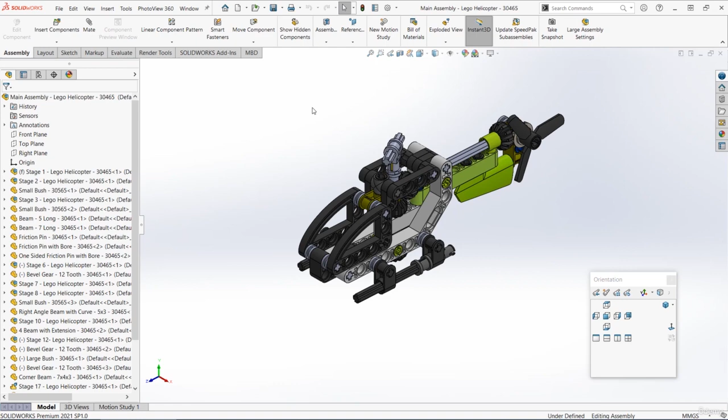We're now onto the final stage, stage 22. For this, we've only got to make one new part, the main rotor blade. And to do this, we're going to modify the large bush part.

Let's find that part somewhere within the assembly and open it. Then let's go File, Save As. Let's choose Save as Copy and Open, and save this as large rotor blade. You can then close your original part.

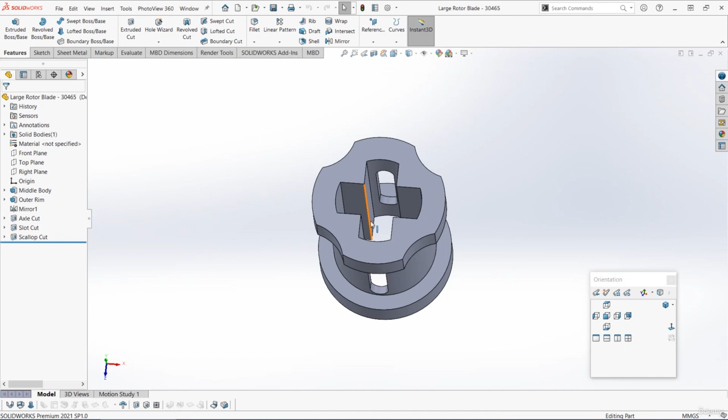If we look at the rotor blade part, on the right it's a large bush, then there's a pin area, and then there's the actual rotor blade. So we can keep this large bush part exactly as it is. We don't have to take anything away, we're just going to add some new features.

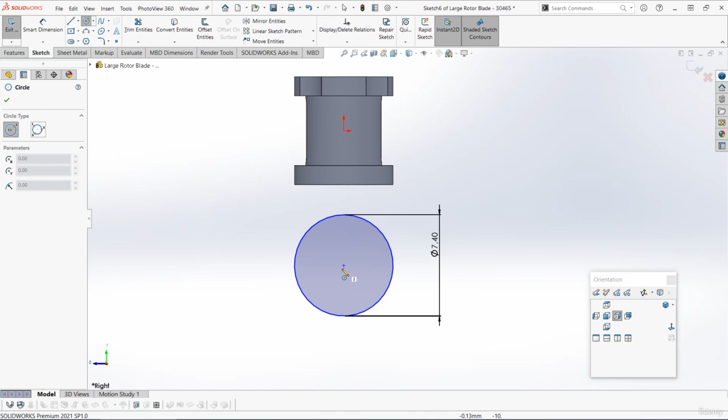First, let's start a sketch on the right plane. We'll go Normal To and get the circle tool and draw a circle somewhere down here, so it should be the opposite end to where those scalloped cuts are. Then the diameter should be 7.4 millimeters, and there's also a smaller circle inside this one that's 4.8 millimeters.

These should both be lined up vertically with the origin. Then for the position from the very end here to the outside of the circle is 15.6, and you can hold down Shift to dimension to the outside of that circle. So you should have 2 fully defined circles which are a little bit away from that existing body.

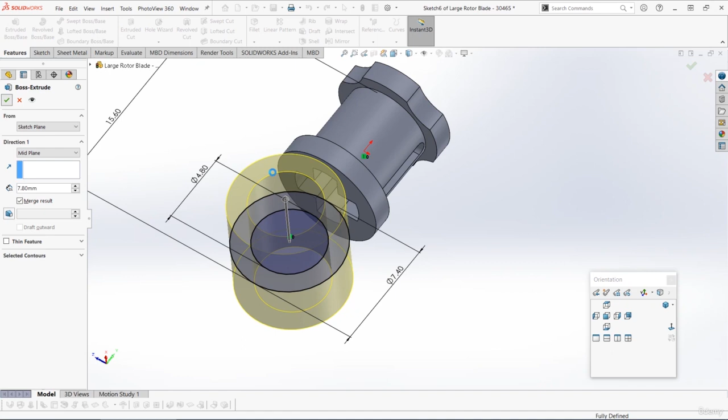We can then go Extruded Boss Base. Let's go mid-plane 7.8 millimeters, and that should insert a new body like this. We can call that something like pinhole.

We now need to join these 2 bodies together. So let's start a sketch on this face, on the first body, and then let's select that outer circle and press Convert Entities. So we should have a 7.4 millimeter circle in this new sketch.

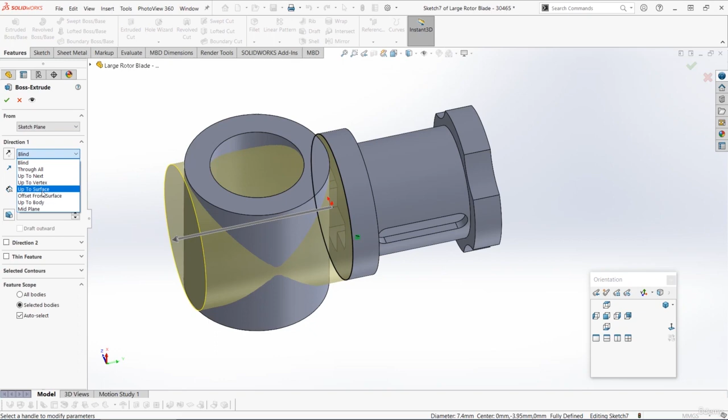We can then just go Extruded Boss Base, and from the drop down, let's choose Up to Surface, and then let's select this surface. So you should join these 2 parts together, something like this. We can call that feature Join.

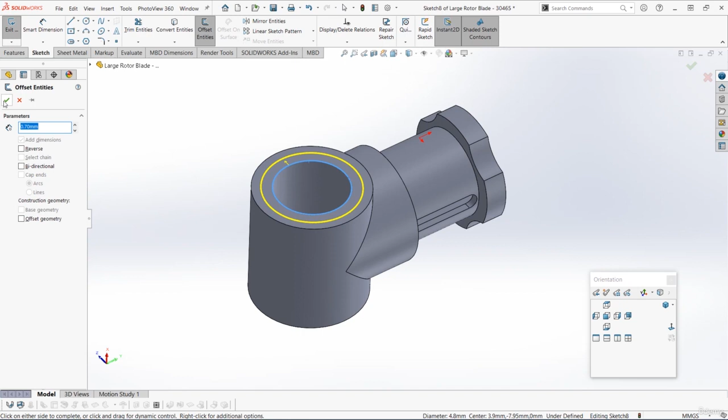Next, before we start actually making the blade, let's cut out the small rim on the top of this pinhole. Start a sketch on this top face, choose that inner circle and then just offset that 0.7. We can then do an extruded cut downwards 0.8, and you can call that feature something like rim cut.

We now have that outer rim on one side and we also want it on the other side. So let's select that rim cut feature, also select the plane that goes down the middle and then press mirror. When the preview looks good, just press OK. So we have that rim cut on both sides.

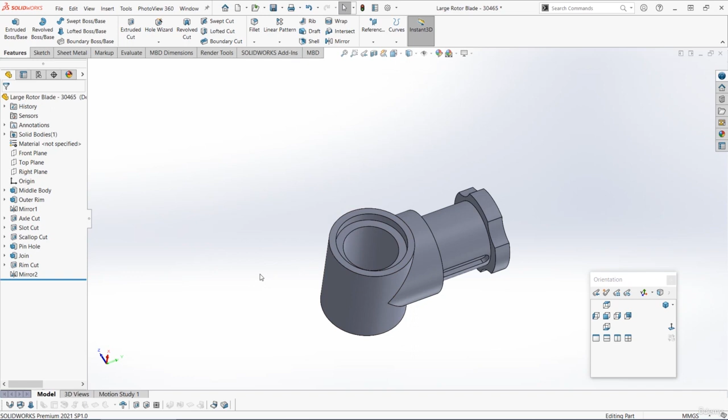Now we can start to actually make the rotor blade shape. First up, we've got a bit of a root section that's a little bit wider than the main blade. To draw this, let's start a sketch on the right plane and go Normal To. First up, I'm going to select that outer circle of the pin area and press Convert Entities, so we now have that circle in this sketch.

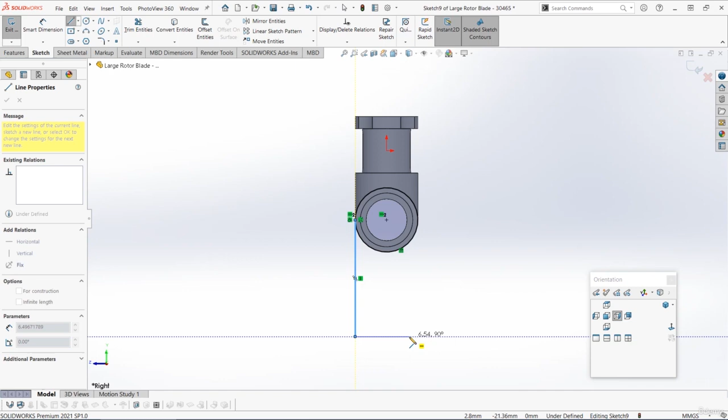Then get the line tool and draw a profile something like this. From this outer point of the circle, I'm going to go directly down and then directly across. Then I'm going to go upwards and slightly right, so we've got a little bit of an angle, and we're going to join that circle. So we don't want to go up vertically, we want a little bit of an angle like this, and let's join on that circle somewhere around here, not at that widest point.

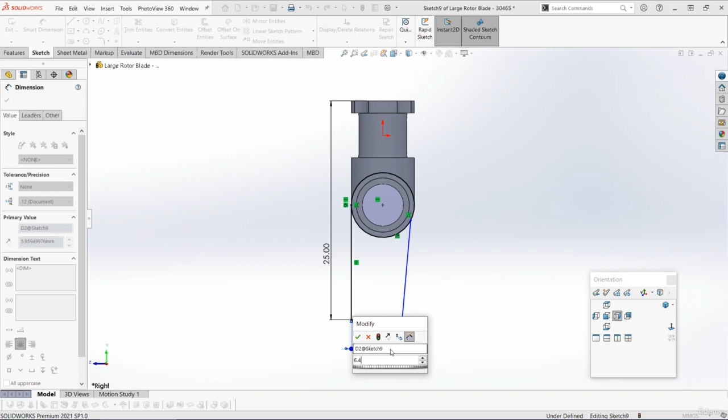We can now set some sizes. Let's set the total height here as 25 millimeters. The width across here should be 6.4. Then over here, let's just select the circle, also select the line, and just make those tangent, and that should fully define your sketch.

Then just before we extrude, let's just round off these bottom corners. I'm going to go to the Sketch tab, choose Sketch Fillet, set a size of 1 millimeter, and then just select those 2 bottom corners.

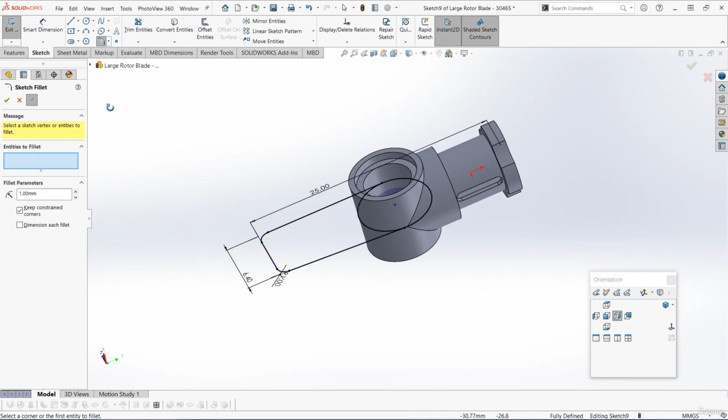We can now extrude this closed area. So let's go to Features, Extruded Boss Base, and I'm going to choose that area there, and then we'll do a mid-plane extrude 3 millimeters. So you should have something like this.

It's like a really small section of the blade, and let's call that feature Blade Root.

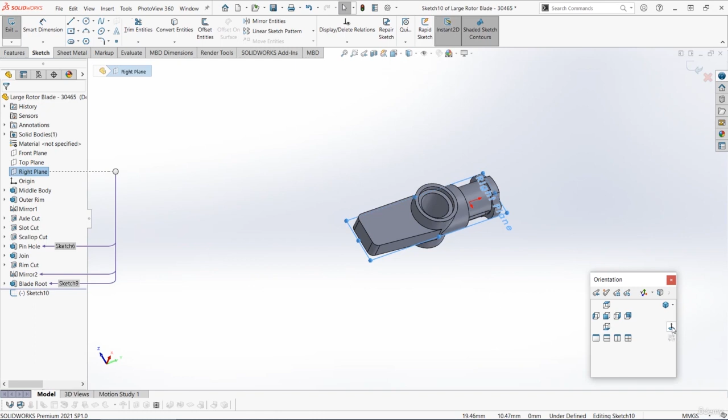We can now draw the rest of the main blade. Let's start another sketch on the right plane. Firstly, let's zoom in, select this circular edge, and press Convert.

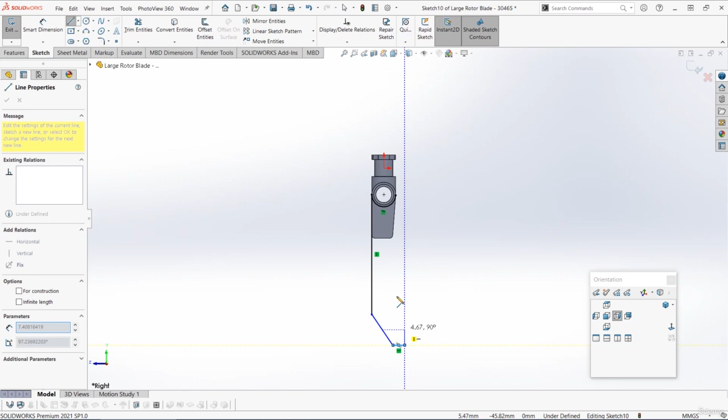You can either select the full circle or just that bottom edge. I've just selected the bottom edge. Then I'm going to get the line tool, and from this left-hand corner, go all the way down vertically to about there. Then I'm going to go in at an angle, then horizontally across, then vertically up to about here, and then into this angled line.

Make sure you don't get the midpoint — we should be somewhere above it, about here. Then I'm going to go back into the right-hand point of that circle, so you should have a fully closed profile, something like this.

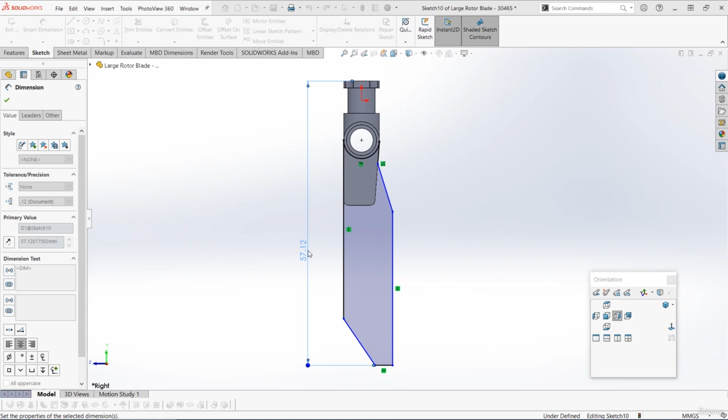Then let's set the size. The total length here from the very end should be 63.2. This small end section here is 4.6. The length of this angled part is 11. Then going up to this corner from the very end here to this part should be 15.6 millimeters. The length here should be 40.3.

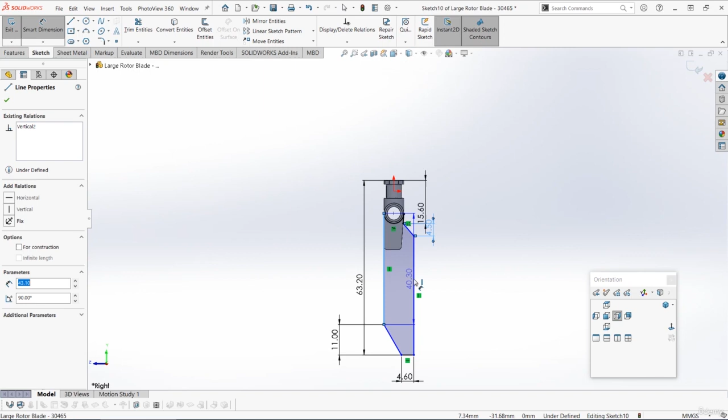Finally, the total width of the blade should be 11.2, and that should fully define your sketch. I'm just going to rotate it around so it's a little bit clearer for you to see.

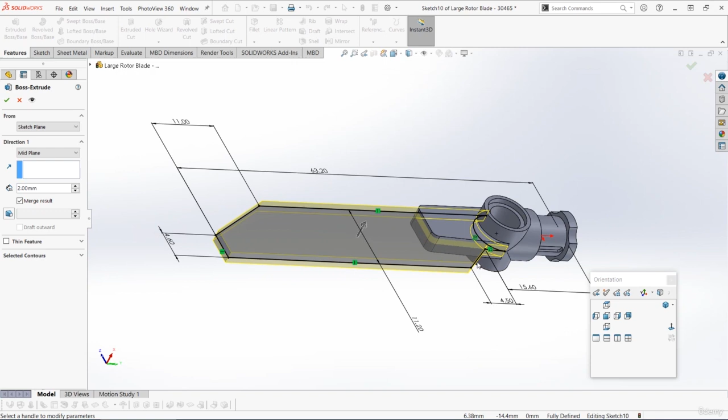We can then extrude this using a mid-plane extrude. So let's go to Features and do a mid-plane, 2mm. If you selected that full circle on the right-hand side, you might now have to click in Selected Contours and choose that enclosed profile for the blade shape. But we should be extruding 2mm mid-plane, and you can then call that feature Blade.

Now before we round this off, there's a slight edge on the back of the blade, sort of for the aerofoil shape, and we'll make this using a chamfer. First select the chamfer tool, it's underneath the fillet tool, and for the chamfer type we want to choose distance distance, not angle distance. If you're on a different version of SolidWorks, your interface might look slightly different, but there should still be an option called distance.

Let's select that distance-distance option, and then down here at the bottom, instead of symmetric, we want asymmetric. This just means we can make a chamfer that isn't symmetrical — each side of the angled cut will be a different length. For those two different lengths, we want to put 0.4 as the first one, and then 5mm as the second one.

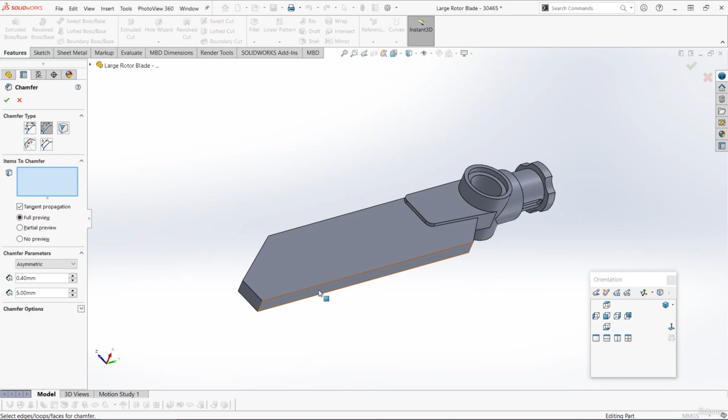Then let's select that trailing edge of the blade like this. Now you should get a preview like this. If yours doesn't work, or if it looks like it's the wrong way round, try just flipping that 0.4 and that 5mm — so try putting 5mm in the first box and 0.4 in the second one.

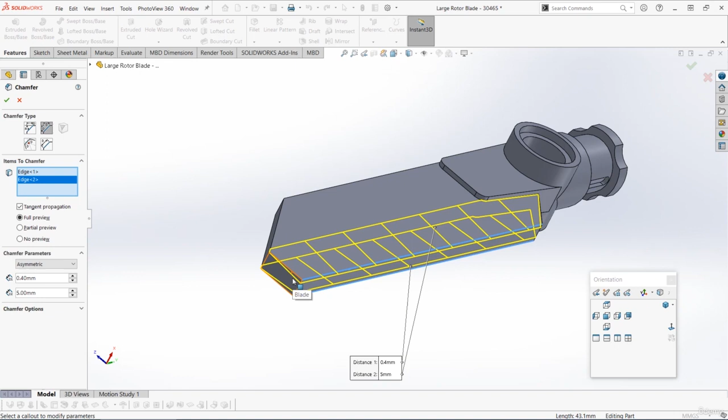And then let's also select this bottom edge. If you find that you can't select both edges, then you might need to add this feature as two separate chamfers, but it should work correctly like it does in this video. Then let's add those chamfers, and we've just added a slight aerofoil shape to the back of the blade there.

Then let's get the fillet tool and let's round off that chamfer. I'm going to add a very large fillet, 50mm, to this edge on the top and also the same edge on the bottom.

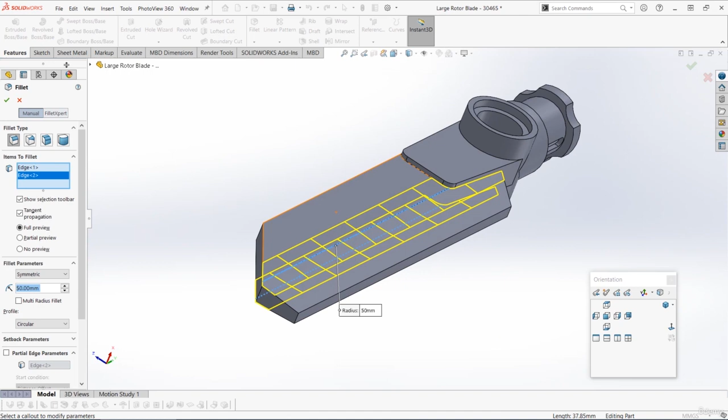Next we can round off some of the outer edges, so I'm going to get the fillet tool again. This time set 2mm, and let's choose these three edges. Then on the corner at the front there's a bit of a larger one, so let's get the fillet tool again — this one is 20mm, and it's that front edge there.

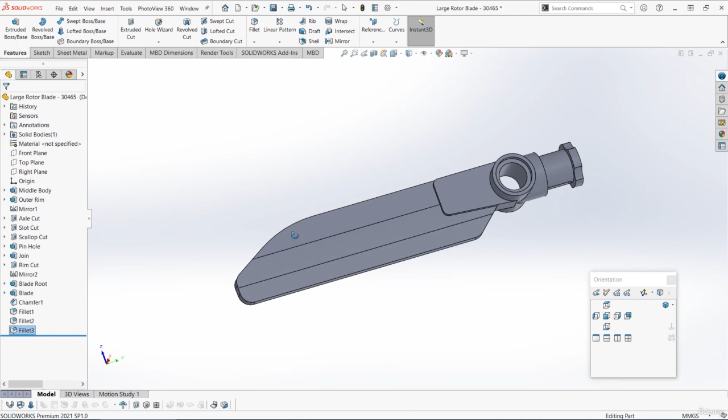And then to finish off, let's get one final fillet. Let's set 0.5, and just add the front edge there — you should select the entire way round automatically. Let's also do the same on the bottom. If you find that you don't select the entire loop, just make sure you've got the tangent propagation option selected on the left. Then press OK, and there we have our large rotor blade, and you can keep the color the same.

In the next video, we'll add this to the final stage.